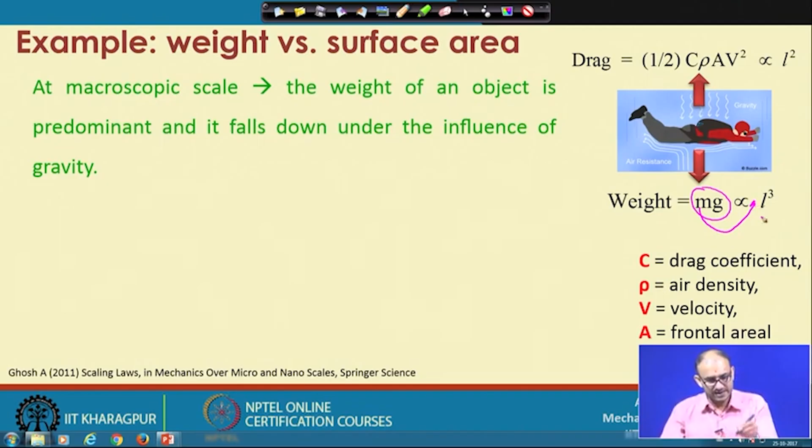There is also a drag force moving in the upward direction, called air resistance. It allows the person to move up, meaning it resists the free fall of the part. That is given by half C rho A V square, and that is proportional to L square in terms of mass. The drag coefficient is C, air density is rho, velocity is V, and frontal area A is proportional to L square.

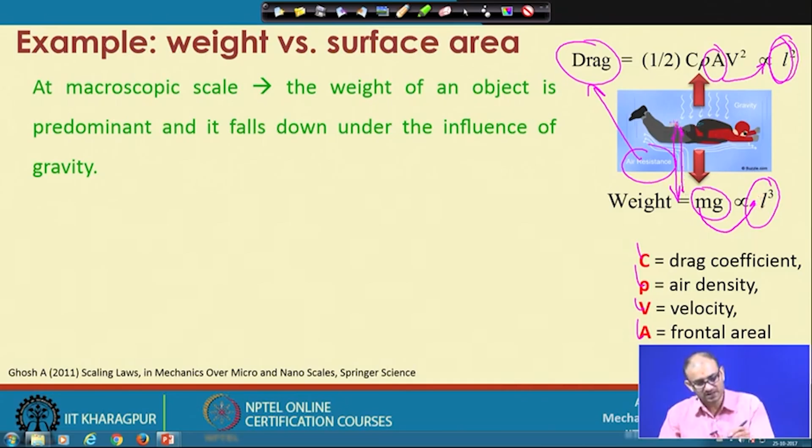So here the weight is scaling as L cube and the drag is scaling as L square. That means the thing pulling the person down scales as L cube, and the thing pushing the person upward scales as L square. Now what will happen in this case?

At microscopic scale, the same object becomes relatively insignificant compared to air resistance. Consider the example of an ant. If you drop this ant from one floor, or 100 meters, or even hundreds of meters, nothing is going to happen. When it reaches the bottom, it will actually fall very freely, but the same thing will not happen to a man falling from a large height.

What is the difference? If you consider it, the difference is the weight. The weight of an ant is very small compared to its size. Now considering the size, this is L cube, and the whole volume is one particular part. Let us consider this is 1000, so it will scale as L equal to 10, and the same thing will happen at L equal to 0.1, where everything scales down to a very small part.

If you put L equal to 0.1 and L equal to 10 into the weight and drag force equations, you can see the weight reduces very drastically, because L cube becomes 1000 in one case and 0.001 in the other. So what happens? The weight is reducing very fast, but the drag is not reducing as fast. So comparatively, drag becomes very large compared to the weight pulling the object down.

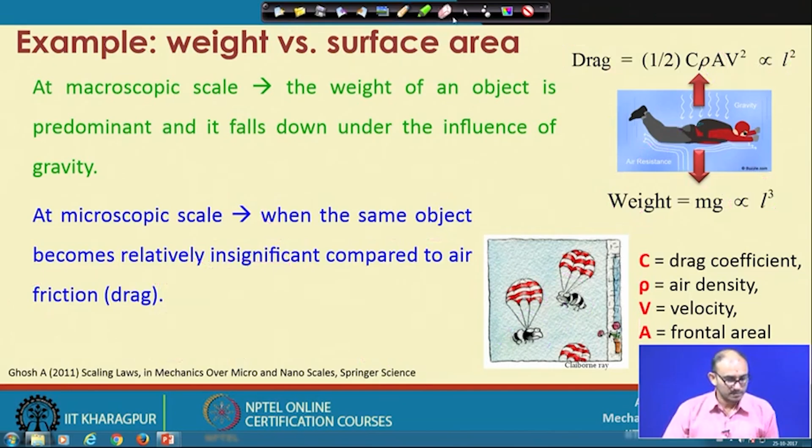Now, coming to the strength to weight ratio. This is also important. Consider the critical buckling strength of an Euler column, ignoring the end condition. This is one particular example: this whole weight is loaded or mounted on one particular column, which has dimensions B, B and L, where L is the length of the column. Let us see what happens in this case.

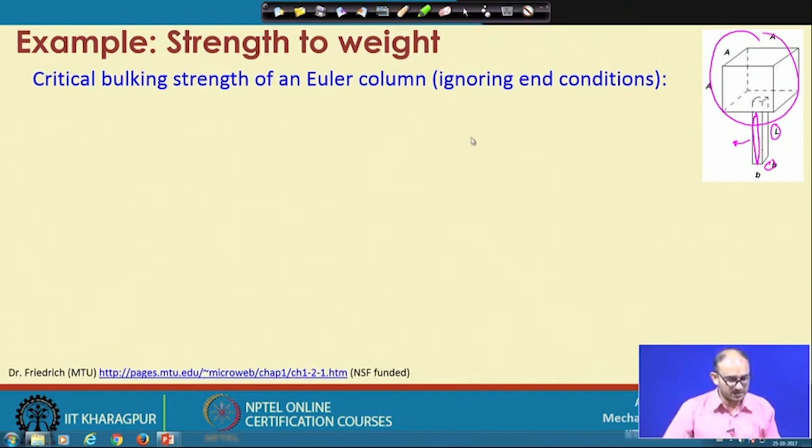Critical buckling strength is given by pi square E I divided by L square. E is the Young's modulus, and it has no connection with the length scale. I is the sectional modulus, and since both cross-section dimensions are B, it becomes B raised to 4 divided by 12. If you substitute that in, pi square and E remain unchanged, I equals B raised to 4 by 12, and L square is also a dimension of this part. So we have two dimensions here: B raised to 4 is on top and L square is at the bottom, so this becomes 2, and the whole equation behaves as L square in terms of dimension.

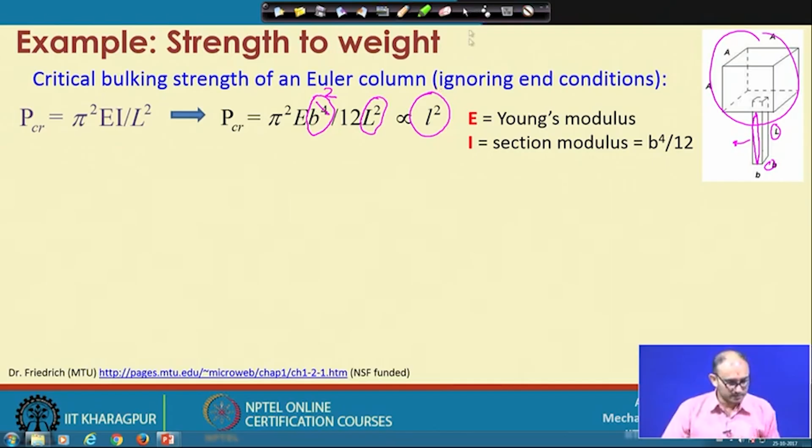We know weight is considered as mg, where m is a parameter connected with the length scale, and it behaves as L raised to cube. Now, when the dimension of the column and the weight shrink linearly, we consider both, since one is connected with weight and the other with dimension. If you consider only the length scale and reduce L, mg will reduce, and this whole strength parameter will also change.

So what happens is that the strength to weight ratio: strength scales as L square and weight scales as L raised to cube, so the whole thing scales as L raised to minus 1. So what is important here? If you reduce the scale, all the weight will reduce as L raised to cube. So if you go from 1 kg to 0.1 kg, it reduces very drastically in terms of weight, but the strength does not reduce as fast, since it is only L raised to square.

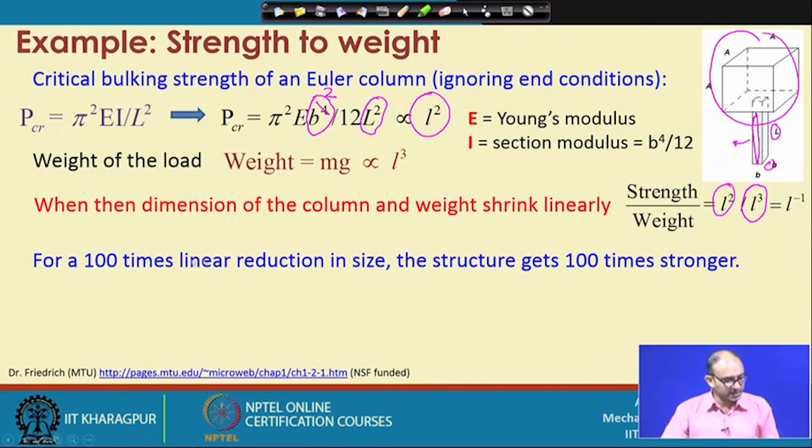So what is the advantage here? For a 100 times linear reduction in size, the structure gets 100 times stronger because it is L raised to minus 1. So the advantage is that if you are scaling down a whole system, like a cantilever beam or something taking the weight of a part, it is very important to note that scaling down smaller things will actually keep the relative strength very large.

For example, a smaller insect can survive a drop onto its legs from a height many times its own size. Even a lizard falling from the top of a 2-3 floor building will walk away quickly without much issue, but a large animal cannot. If you did the same thing with an elephant, it would die at the bottom. So these are examples from natural shapes, but the same thing happens with man-made things: when you design a beam element with weight on top of it, this scaling becomes important to understand how the strength to weight ratio affects the design consideration.

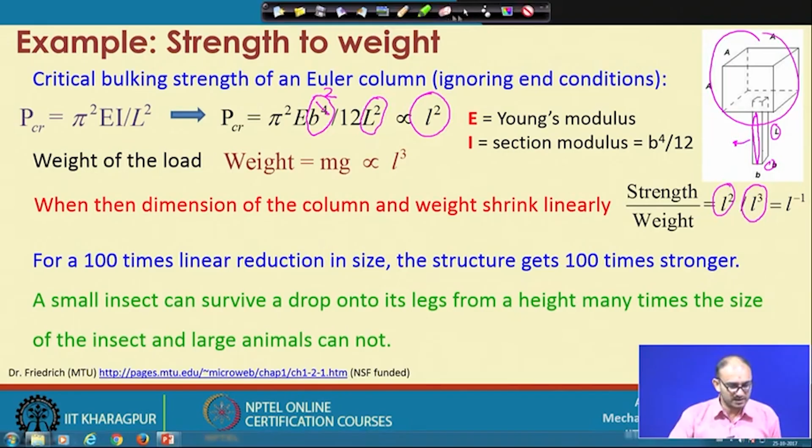Now coming to the scaling effect on the spring constant, let us see. There is a cantilever beam, and at the free end we apply a force F, and because of that force F we get some deflection. Maximum deflection occurs at the edge of the square beam, and this is the cross section, something like this.

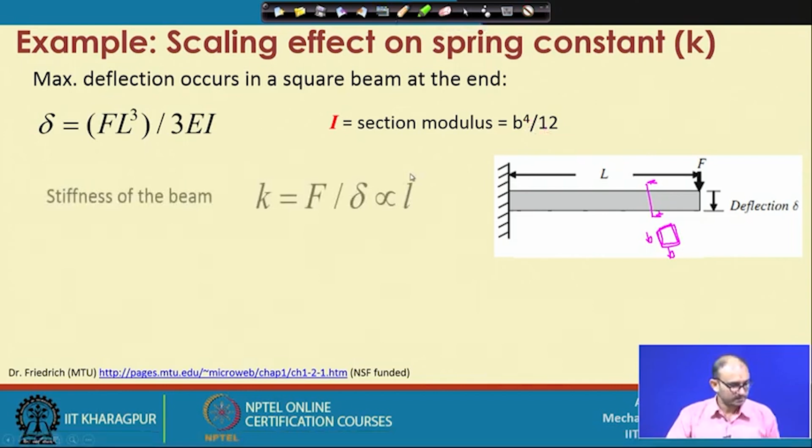So what is the equation? Deflection equals F into L cube divided by 3 E into I. F is the force applied, L is the particular length, E is the modulus, and I is the section modulus, which for this square cross-section with both dimensions B becomes B raised to 4 divided by 12. Stiffness of the beam is given by force divided by deflection.

Now let's take the deflection equation first. Here F is directly connected with length L, and I is also a dimensional parameter connected with the cross section B. So it becomes L cube divided by L raised to 4, which means it is L raised to minus 1. Now consider stiffness: force is here, but deflection is in the denominator, so this L raised to minus 1 comes back on top, meaning K is proportional to L raised to 1.

So, this is the formula. The smaller the beam, the smaller the K value and the more flexible it is. So, that is the advantage of going down into the dimensional scale.

Your beam becomes more and more flexible. If you consider MEMS, or the micro electromechanical system, there are many applications where you use the cantilever beam as a sensing element. Let us take one example.

So, this is the cantilever beam, and this is considered as a capacitor. This is connected as positive, this is connected as negative, and this is the gap between the two plates.

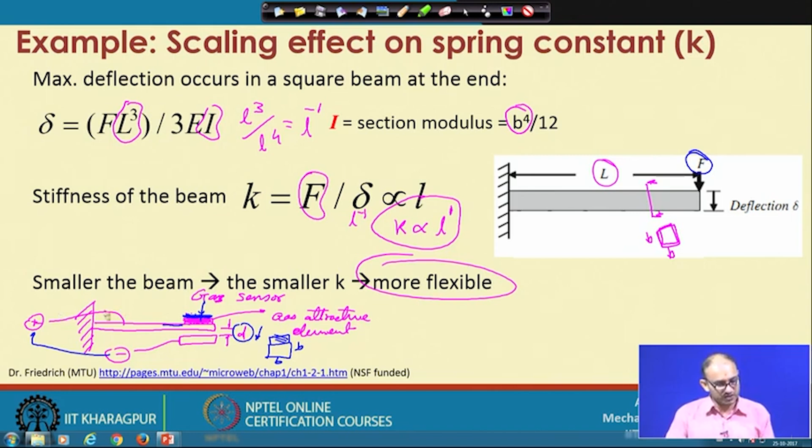So, this is one of the examples. There are many examples like that which you can use as a sensing element, gas element, or actuating element.

So, stiffness of beam under self weight, let us take this example also. Now here we are not putting any weight. Let us see what is the weight of the beam which will self sustain, that means up to which length or weight you have to make a beam so that it will not fall down under its self weight. So now we are removing that particular F from here.

Again the same equation, deflection is given by F L cube by E I, the same thing here. Now F will be replaced by the weight of the beam, because we have removed the external loading, but we consider the beam's own weight behaves as the weight.

Again, the beam weight is given by W, and we know W, considering the earlier case that this beam is a square beam, with dimensions B by B, as written here. So this is the W.

Now, in place of F you are putting W here, and if you put W here, what is going to happen?

Now W has an L cube, we have seen that it is rho into V, and already L cube is here, so it will be L raised to 6. At the denominator, I is there, and I is connected with B raised to 4, so at the bottom it is L raised to 4. So it will be L raised to 6 by L raised to 4, and that is the reason you are getting L raised to square.

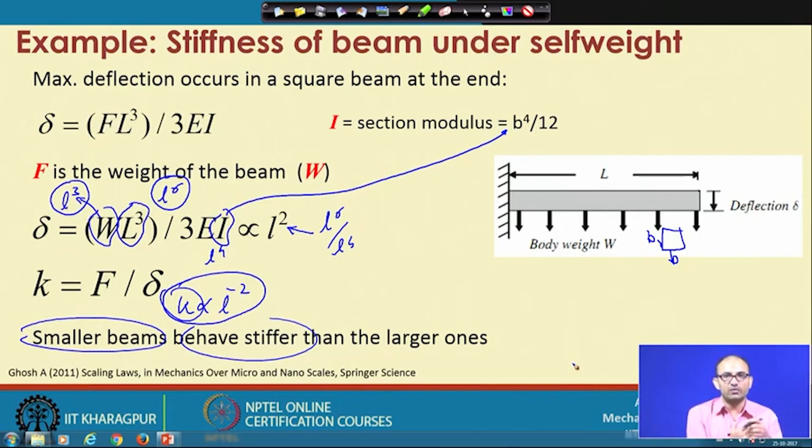So, if you reduce the dimension, that means a smaller beam behaves more stiffer, so if you reduce the dimension, your K will go up. If there is no external loading, consider this is just a beam only, and you want to see what total length or dimension the beam should have so that it will not fall down. So again you have to consider stiffness. It is scaling down as L raised to minus 2, so smaller is the beam, more stiffer is the part. That is the way you can design the beam for different systems also.

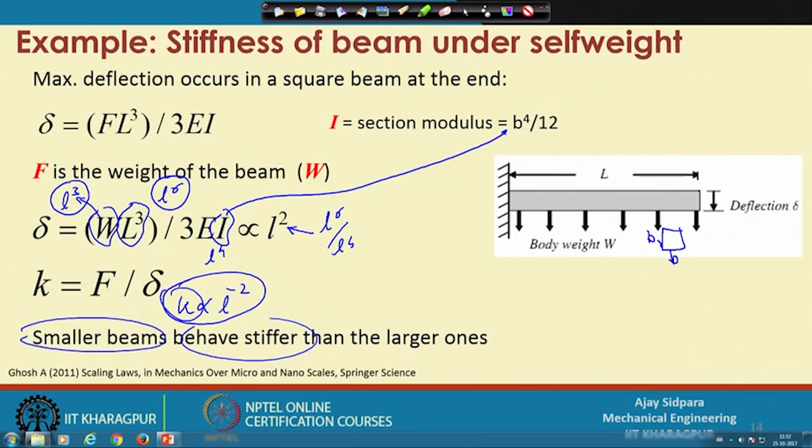Now, strength of a cantilever beam. Let us consider strength, because cantilever is a mechanical system that can be used for different design elements when assembling different parts. Maximum bending stress occurs in the square beam at the constraint, so again we have taken that square beam with cross section B by B. We are putting one load at the free end, total length of the beam is L, and here is the modulus and the section modulus.

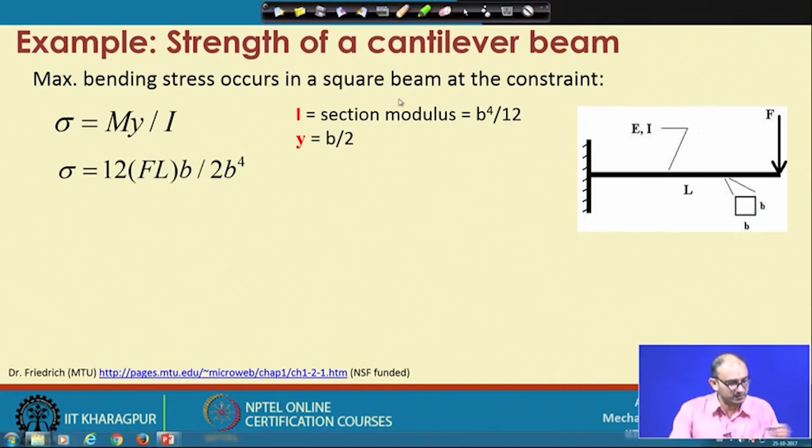So what are the parameters which have length scale? This is one length scale, this is another length scale, and this L has one more L scale, and this is also L square. So what is happening here is we end up with sigma equal to 6 FL divided by B cubed. This is going down and down, L has one parameter, B has one parameter, so it becomes L square divided by L raised to 4. So this comes as L square, and this B comes as L raised to 4.

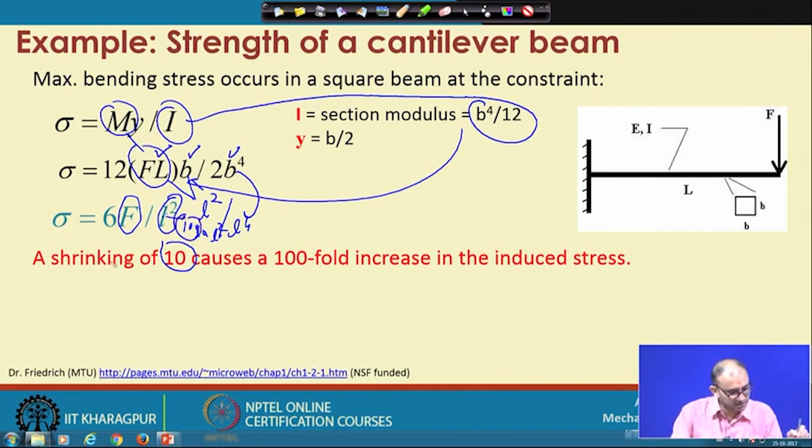Now if you consider F as a constant, we are not looking at F right now, but consider the dimension only. So if you shrink the dimension by 10 times, that means L equal to 1, it will come to L raised to 10 times is L raised to 2, so that becomes 100. That is the reason that if you reduce the dimension, since this whole thing is in the denominator, your induced stress will be very high in this particular case.

Now what we want to do, let us take it in another way, let us keep the induced stress constant, let us fix this particular thing. Now if you want to keep this constant, we have one other variable, called F. So if you are keeping the stress value constant, then the force acting on the beam must decrease as the square of the characteristic dimension. Why is this happening?

Consider here only: sigma equals, let us ignore the 6 right now, L raised to square. Now we want to keep this constant, and we do not want this particular thing to pass through the bending stage or buckle like anything.

So if you want to do this, if you reduce the dimension L while keeping sigma constant, what is the variable? The variable is F. So to keep sigma constant, whenever you are changing the dimension L, the reduction of force should also be proportional to L square, because F is equal to sigma into L square from this equation. So keeping sigma constant, F should be proportional to L square.

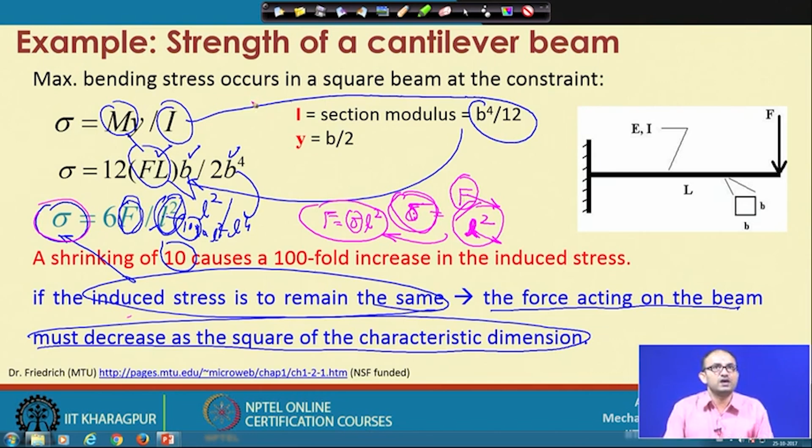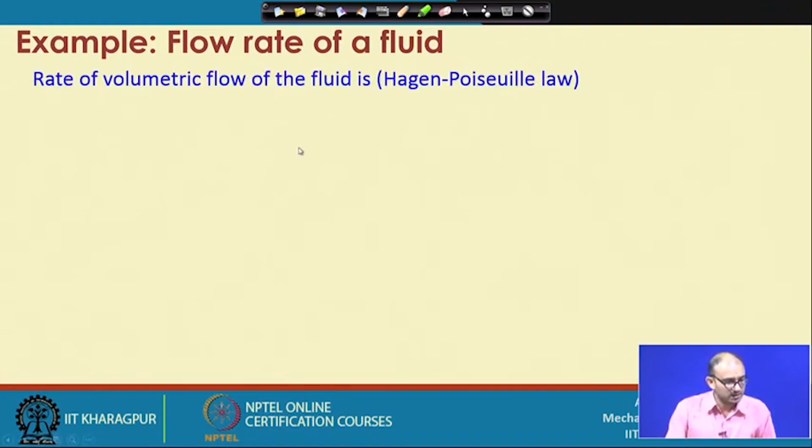Now let us take an example from fluid mechanics. The rate of volumetric flow of the fluid is given by this equation: Q equal to pi A raised to 4, delta P, divided by 8 mu into L. This is for a tube where flow comes in from one direction and goes out the other, length is L and radius is A, and the total pressure drop you can measure is delta P.

Now what is the important part here? A is one of the dimensional parameters, the radius. Right now we are discussing the radius only, not the length. So Q is proportional to A raised to 4. Let us consider this as per unit length.

So what is going to happen if you reduce the dimension, the radius, 10 times? Since it behaves as A raised to 4, the reduction in volumetric flow will be 10,000 times. Let us keep the length constant and see how much flow we can pass through. So reduction in this length scale, the radius, means the volumetric flow will reduce by 10,000 times.

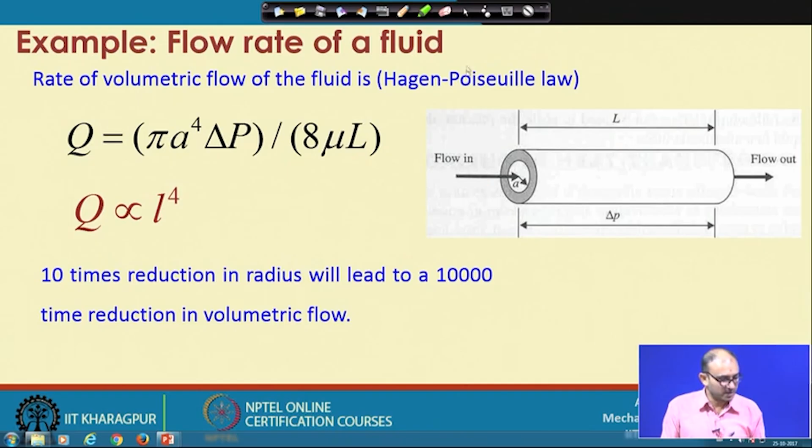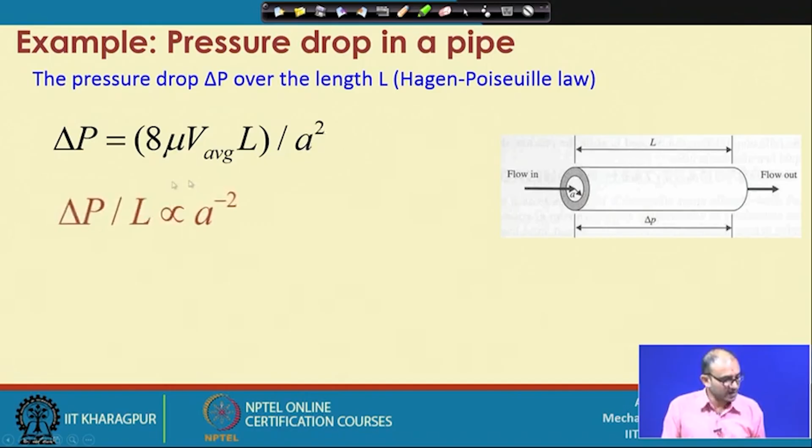So now consider the pressure drop per unit length. Here we are considering unit length, not the full length scale. So what happens in this case is it becomes L raised to minus 2. So here's the important part.

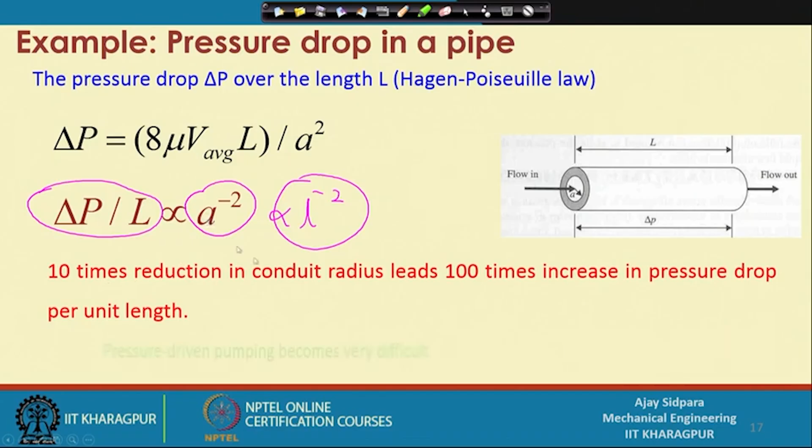A 10 times reduction in the radius will lead to a 100 times increase in the pressure drop per unit length. So if you reduce the diameter, your pressure drop will be very high. Pressure drop means the difference between the inlet and outlet pressure.

So what is the problem? Pressure driven pumping becomes very difficult when working with microfluidics. You cannot just push the liquid from one location to the other, so you need some extra element or external force to drive the liquid inside it.

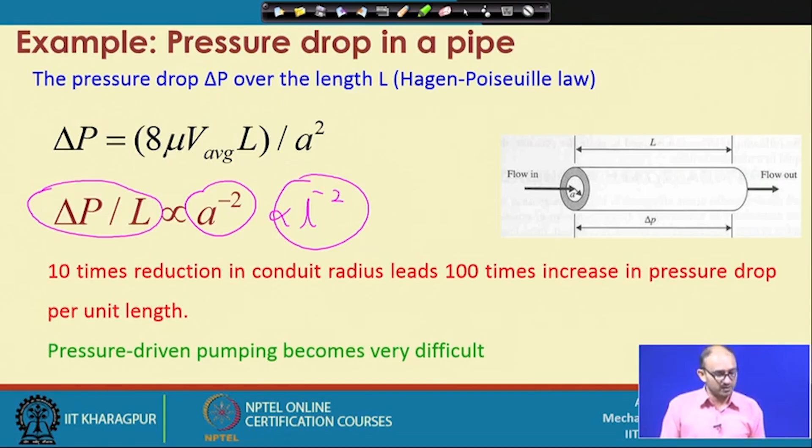Many examples exist where people put a piezo actuator on the surface, with a flexible tube. These are piezo actuators, a piezo actuating sheet. What happens is this creates one type of wave, a pressing action. So if you provide a signal here,

it will contract a little bit, something like squeezing a toothpaste. So it creates a wave, and because of that wave, the liquid becomes pressurized and moves in that direction. That is one way you can pressurize the liquid externally, or you have to work with a variable diameter of the tube so that at a later stage the diameter is very high, making movement easier.